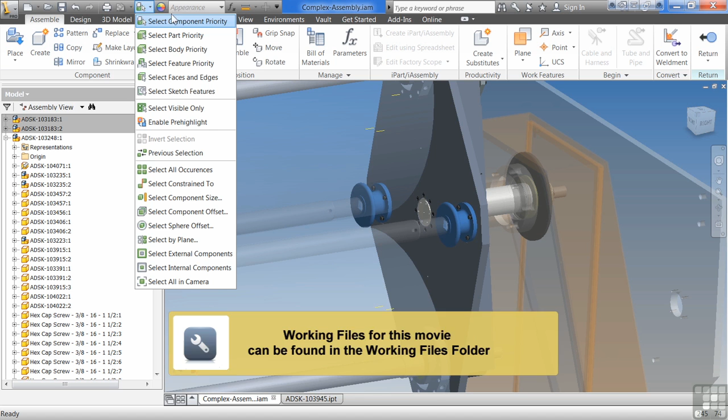In the last exercise, we were looking at selection tools. We were able to set priorities based on what level inside the hierarchy it was. You'll notice in the assembly there's a few more options though. What we can do is select and isolate components based on certain information.

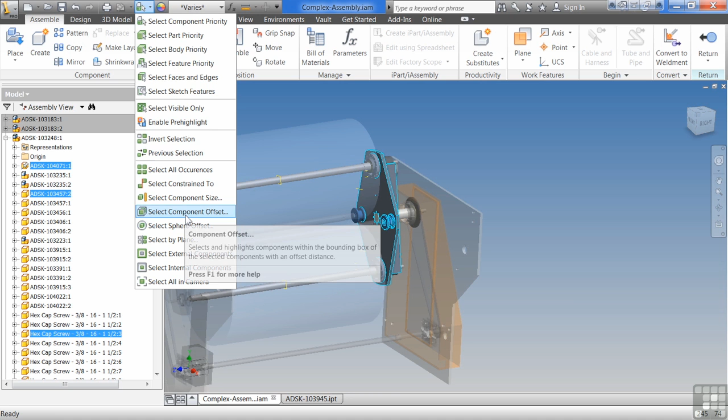So I could say select everything that is constrained to this. There's several things constrained to it, some screws, this plate - it's actually constrained to the plate. I could come in here and say give me everything that would fit inside of this rectangle right here, so anything that's within 160 millimeters of this subassembly, it's going to give me a selection of it.

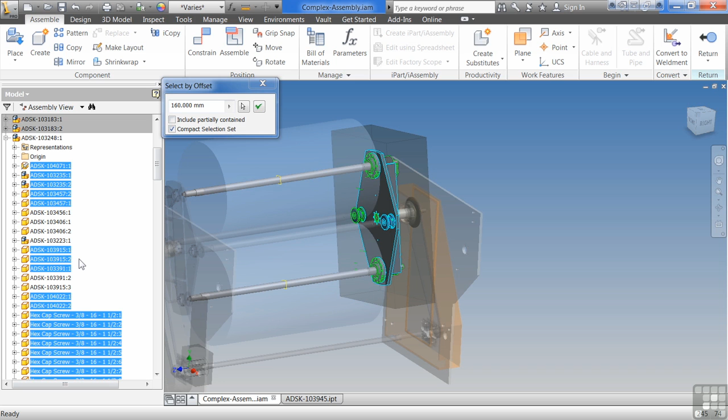So I could say anything within 3 feet of an electrical cabinet that I may be designing has to have shock or arc proofing to make it safe. So then I could select that area around that machine and give it special rubber coating or something like that. Or if we're dealing with acids, maybe anything within 48 inches of the acid bath we have to coat in a special epoxy. So I could offset around that.

Some of the other options are I could say give me everything that is 10% of the machine size. Or if I wanted to do nuts and bolts on a pretty large machine, I could say at most 5% of the machine size. So it's going to go through and basically select everything that's a little bitty - nuts and bolts, screws and bushings and bearings and things like that.

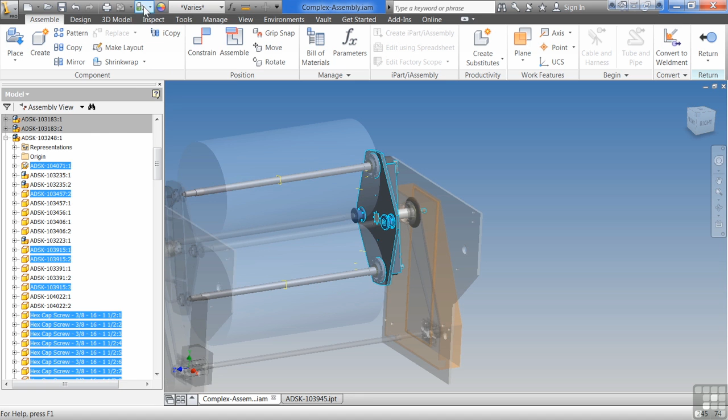And what I could do then is isolate those down and add them to a new level of detail, or I could turn them off. Everything that's a little bitty, I'm not even going to be able to see it anyway, so let's turn it off. I could go through and select everything that is visible.

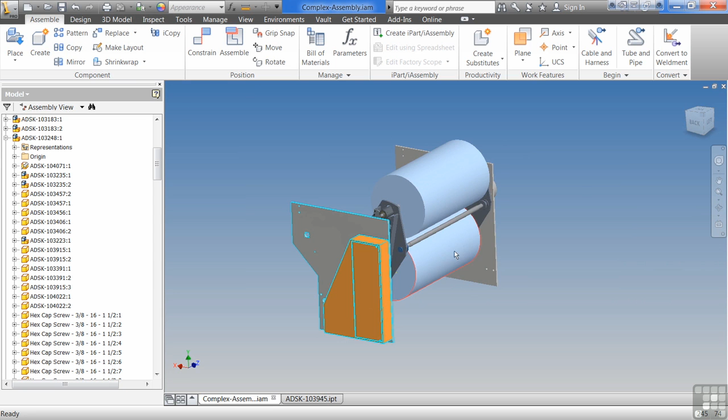So you say, well, what do you mean visible? Right now I can see all these components because they're all on the outside. But if I go out here, there's some things inside of here that I can't see. So I could say, give me all of the visible parts inside of this - everything that's visible inside of this whole thing.

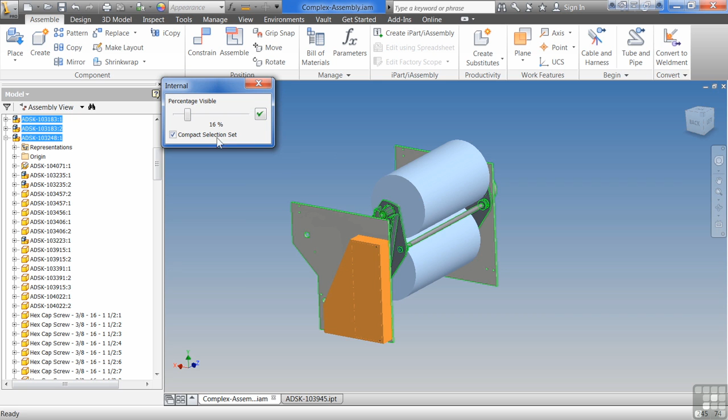Then I could invert it and basically say give me everything that's hidden. I could say give me all internal components or all external components. So if it's encased inside of something, I could see everything. If it's visible outside of this, show it to me. If it's not visible, don't show it to me, so to speak.

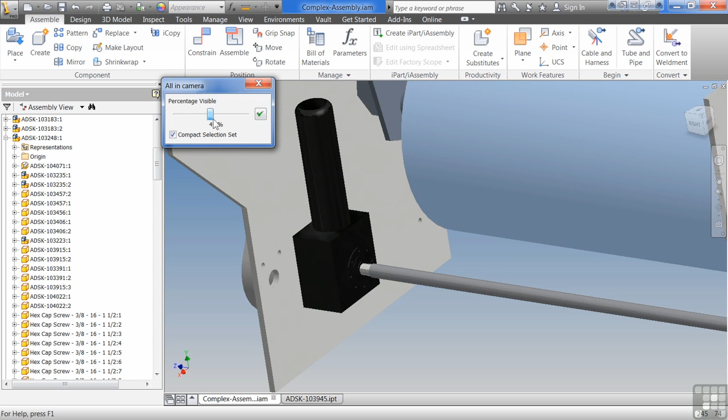I can take and say give me everything that's in the camera, so if I can see it, basically select it. Right now I can see everything, so I can select it. But if I were to zoom in here, if it's 100% visible, show it to me. And I can adjust how visible it is and how much I want to select it. So there's some nice isolation filters in here.

You can say give me everything that's on this side of this plane, or I could flip it and say give me everything that's on that side of that plane. So you could say everything that's on this side of the conveyor gets this, everything that's on that side of the conveyor gets that.

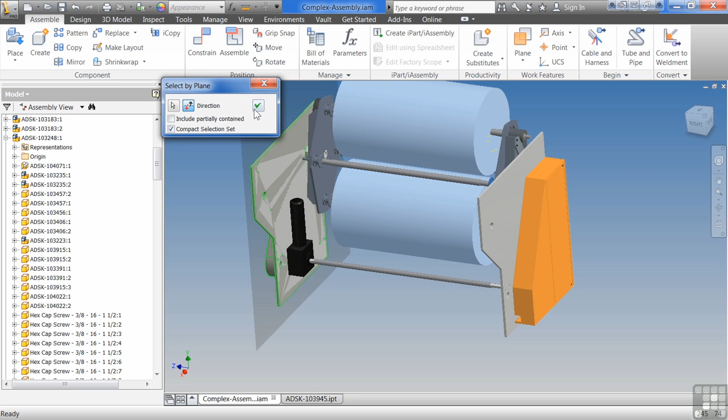So it's an ability to go through and isolate different parts of your machine. Maybe certain parts on a certain size get a certain color. Everything on the outside gets painted the company color, everything on the inside gets flat gray because it's cheaper or whatever. So you can go through and isolate these things and select and control in an assembly environment what you can see and what you can select and how you can use it.

You'll notice whenever I select it here, it does actually select it over here in the browser. So everything is related there based on this selection. Hit OK - so now I can select things.

It's pretty simple, easy to use. I'm not going to go into too much detail because it's that simple. Play with it, see what you can do with it, have some fun with it.